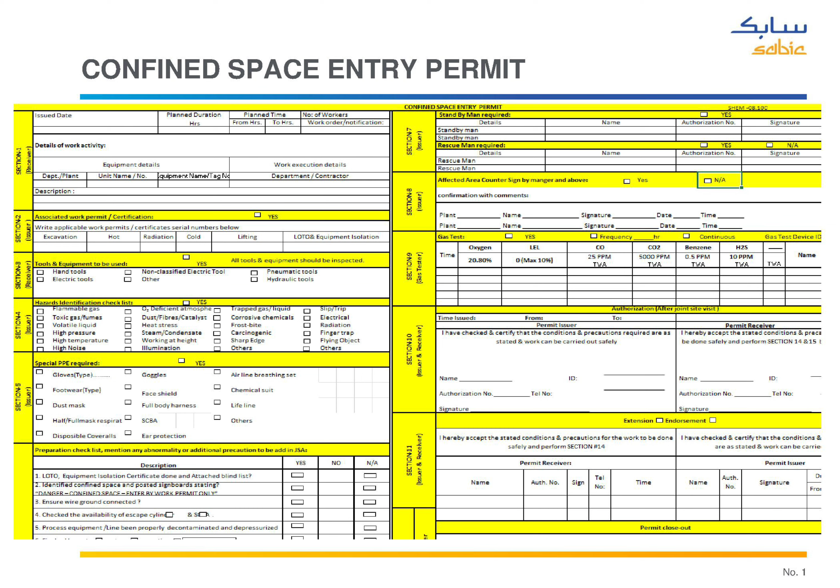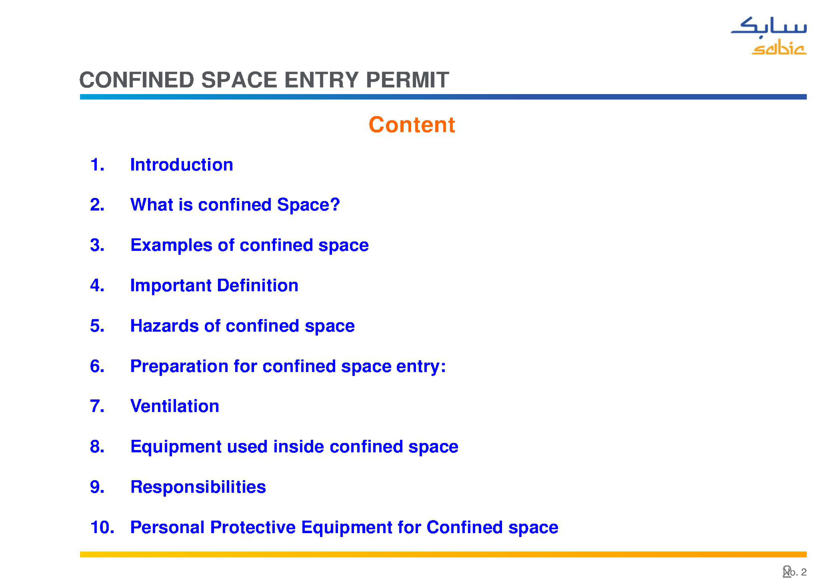Let's get started. You can see in the picture Confined Space Entry Work Permit, and Confined Space Entry Permit introduction. What is confined space, examples of confined space, important definitions, hazards of confined space, preparation for confined space entry, ventilation equipment used inside confined space, responsibilities, and personal protective equipment for confined space.

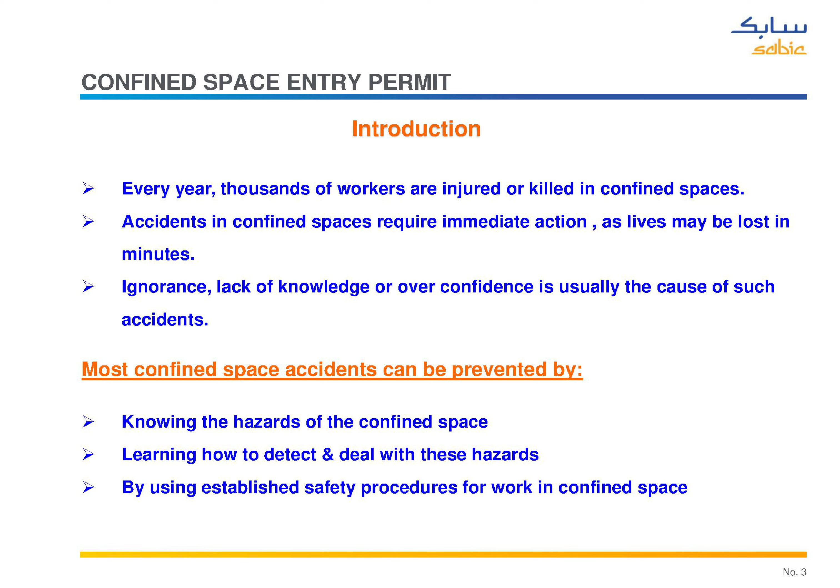Every year, thousands of workers are injured or killed in confined spaces. Accidents in confined spaces require immediate action, as lives may be lost in minutes. Ignorance, lack of knowledge or overconfidence is usually the cause of such accidents. Most confined space accidents can be prevented by knowing the hazards of the confined space, learning how to detect and deal with these hazards by using established safety procedures for work in confined space.

What is confined space? It is large enough and so configured that an employee can enter bodily and perform work. It has limited or restricted means of entry or exit. It is not designed for continuous human occupancy.

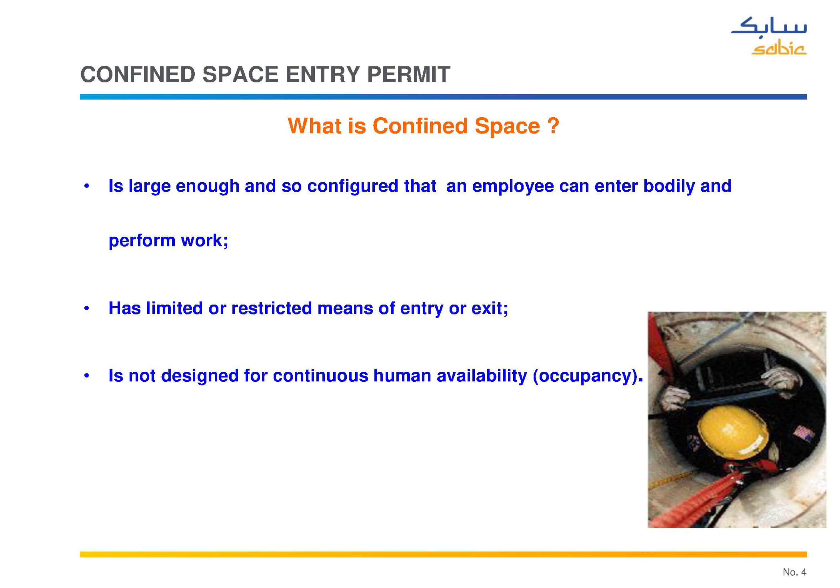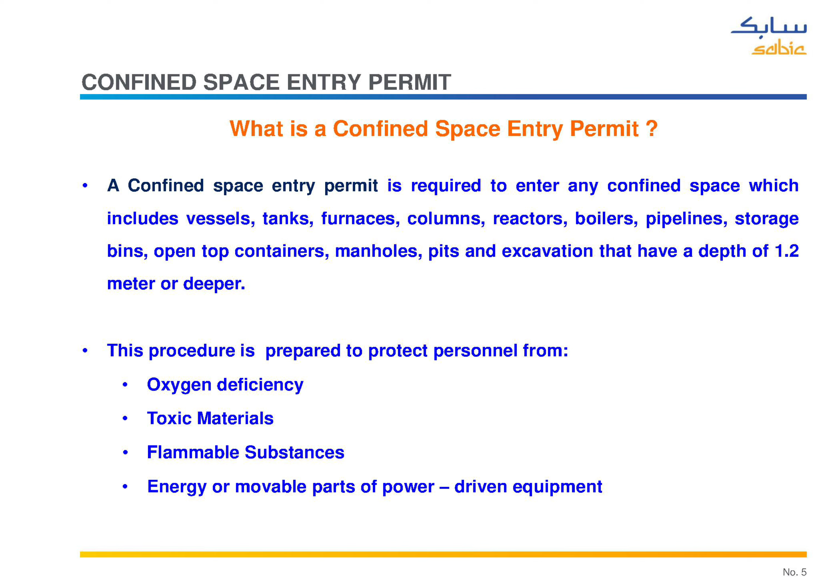What is a confined space entry permit? A confined space entry permit is required to enter any confined space, which includes vessels, tanks, furnaces, columns, reactors, boilers, pipelines, storage bins, open-top containers, manholes, pits and excavations that have a depth of 1.2 meters or deeper. This procedure is prepared to protect personnel from oxygen deficiency, toxic materials, flammable substances, energy or movable parts of power-driven equipment.

Examples of confined space, see in picture.

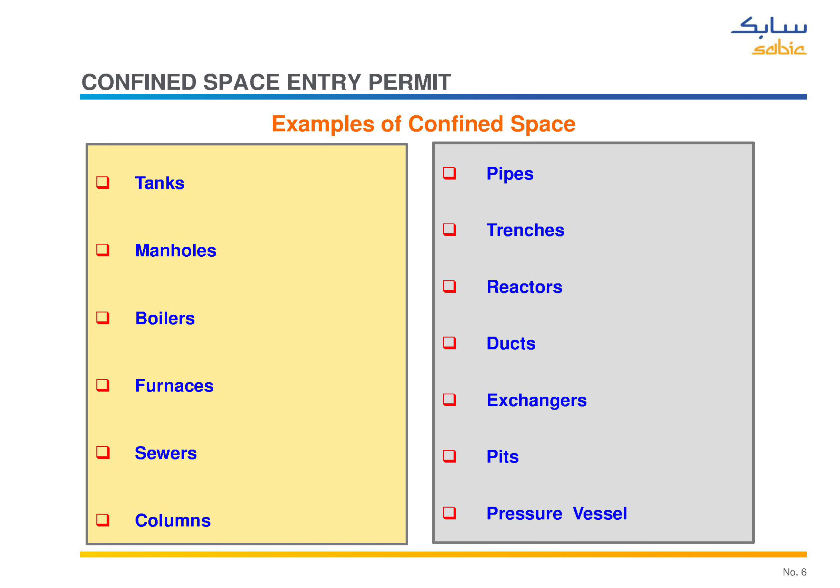Important definitions: Entrant - any person who enters the vessel. Entry - the insertion of the man's head or any part of the body into a confined space. Asphyxiant - a vapor or gas that can cause uneasy feelings, unconsciousness, or death by lack of oxygen, suffocation, such as nitrogen gas. SCBA - self-contained breathing apparatus.

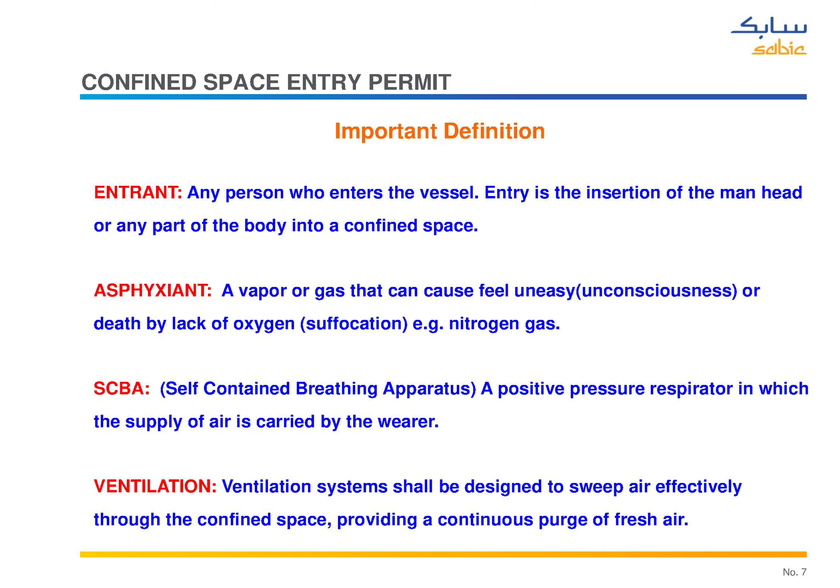A positive pressure respirator in which the supply of air is carried by the wearer. Ventilation systems shall be designed to sweep air effectively through the confined space, providing a continuous purge of fresh air. Airline respirator - a respirator connected to a compressed breathing air source by a hose. Rescue man - an individual trained, qualified, nominated and certified in rescue responsibilities, confined space hazards, and emergency procedures who has been assigned to remain outside the confined space.

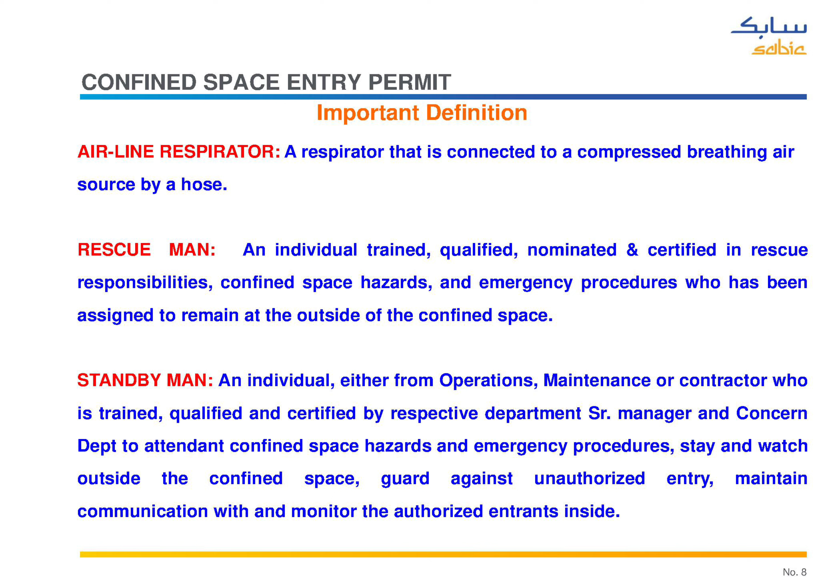Standby man - an individual, either from operations, maintenance or contractor, who is trained, qualified and certified by the respective department senior manager and concerned department to attend to confined space hazards and emergency procedures, stay and watch outside the confined space, guard against unauthorized entry, and maintain communication with and monitor the authorized entrant inside.

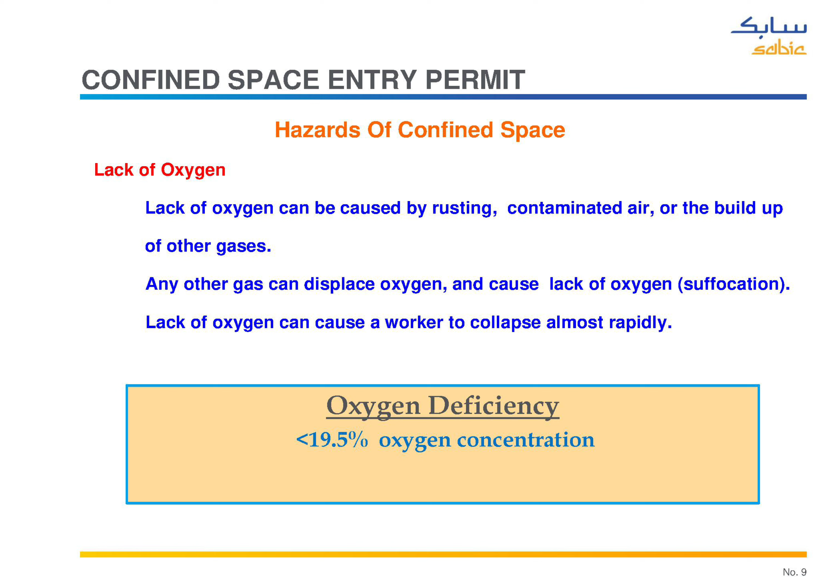Hazards of confined space: Lack of oxygen can be caused by rusting, contaminated air, or the buildup of other gases. Any other gas can displace oxygen and cause lack of oxygen, suffocation. Lack of oxygen can cause a worker to collapse rapidly. Oxygen deficiency is defined as less than 19.5% oxygen concentration.

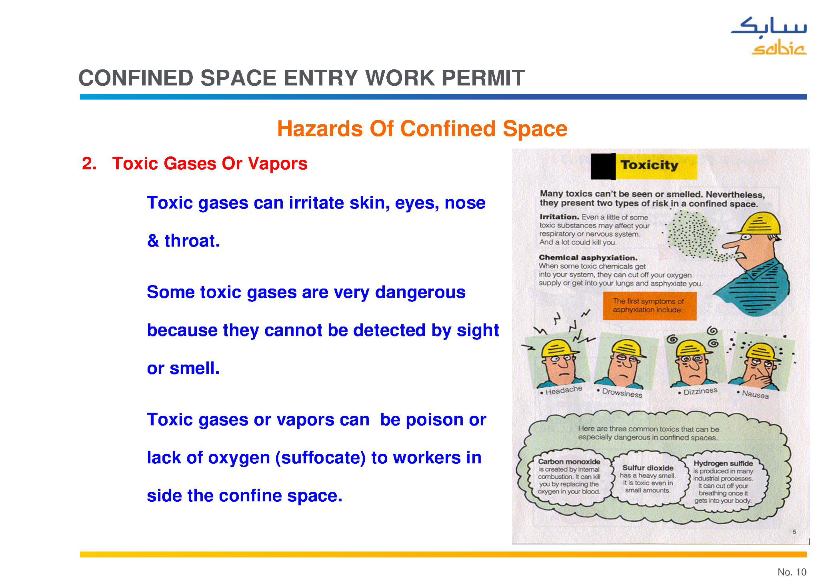Toxic gases or vapors can irritate skin, eyes, nose and throat. Some toxic gases are very dangerous because they cannot be detected by sight or smell. Toxic gases or vapors can poison or cause lack of oxygen, suffocating workers inside the confined space.

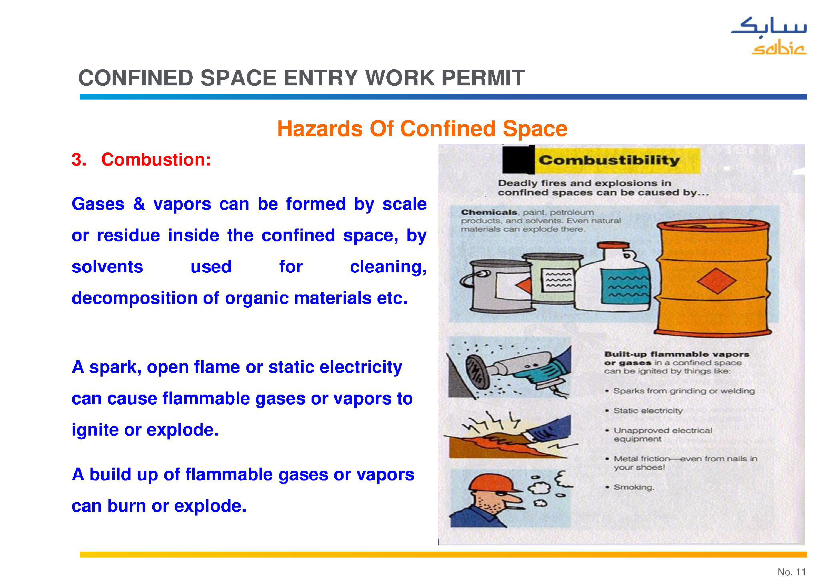Combustion: gases and vapors can be formed by scale or residue inside the confined space, by solvents used for cleaning, decomposition of organic materials, etc. A spark, open flame or static electricity can cause flammable gases or vapors to ignite or explode. A buildup of flammable gases or vapors can burn or explode.

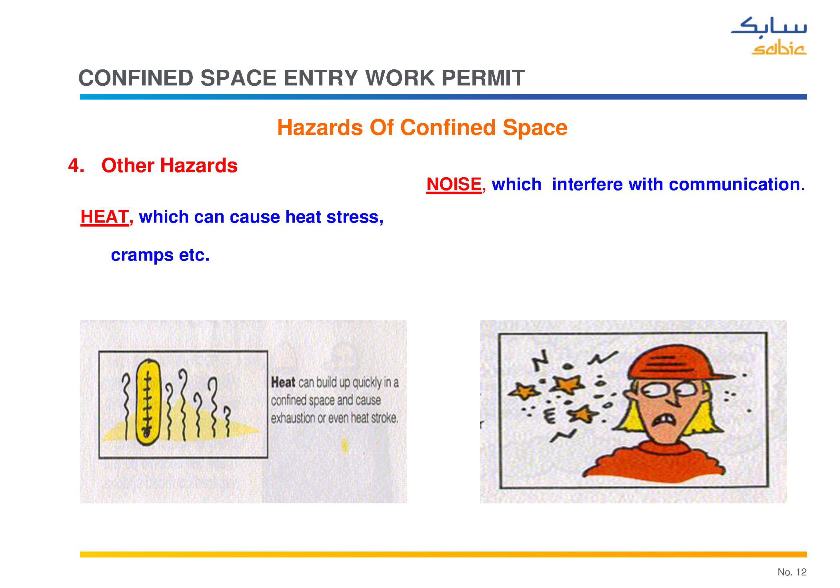Other hazards: Heat, which can cause heat stress or cramps. Noise, which can interfere with communication. Mechanical equipment, which can cause sparks and physical injury.

Preparation for confined space entry. The operations supervisor is responsible to lead and ensure the following tasks as preparation for entry by using the relevant SOP: draining, depressuring, flushing, washing, cleaning, steaming, isolation, blinding, ventilating, and gas testing, both initial and at frequent intervals.

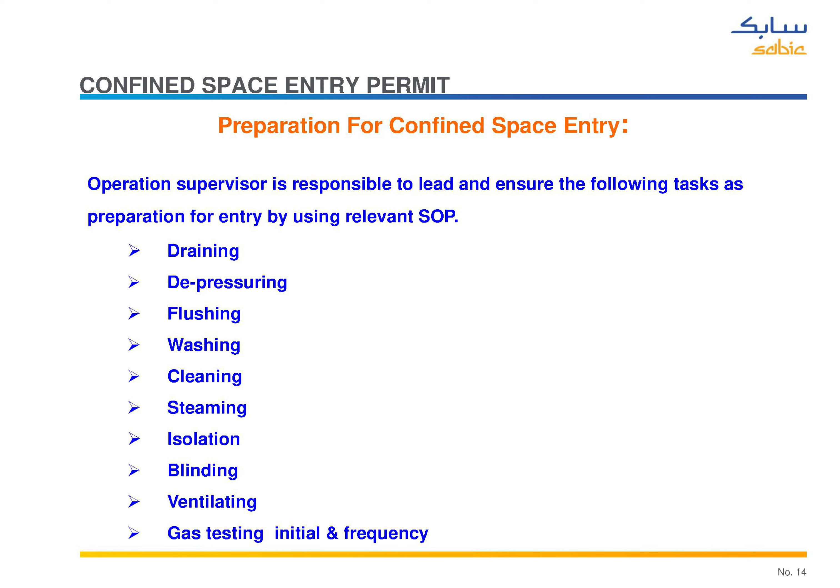Isolation involves either disconnecting lines and installing blind flanges on the open pipe flanges, as close as possible to the equipment, or installing blind flanges in the pipes themselves. Electrical lockout involves locking out any electrically operated equipment connected to or associated with the vessel or confined space.

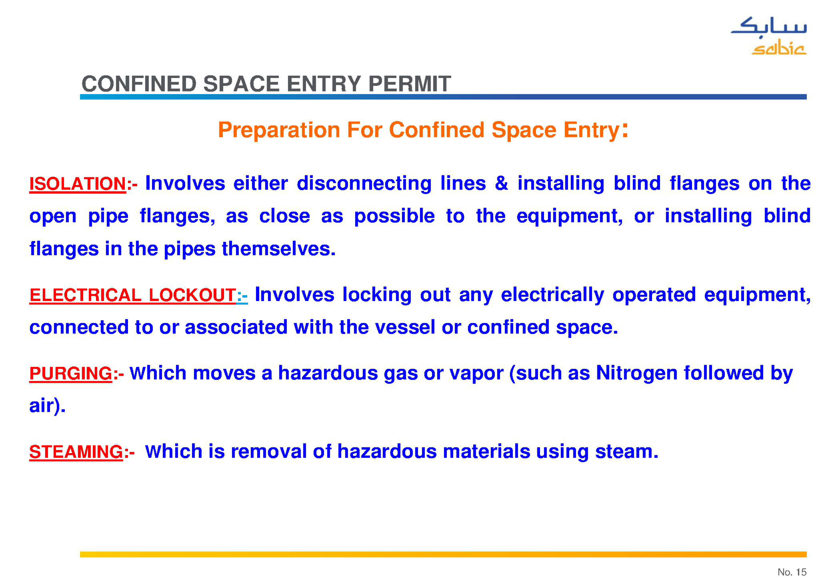Purging, which removes a hazardous gas or vapor, such as nitrogen, followed by air. Steaming, which is removal of hazardous materials using steam. Flushing, which moves hazardous materials to a safe location using non-hazardous materials such as water. Ventilation, which displaces a possible hazardous atmosphere with air.

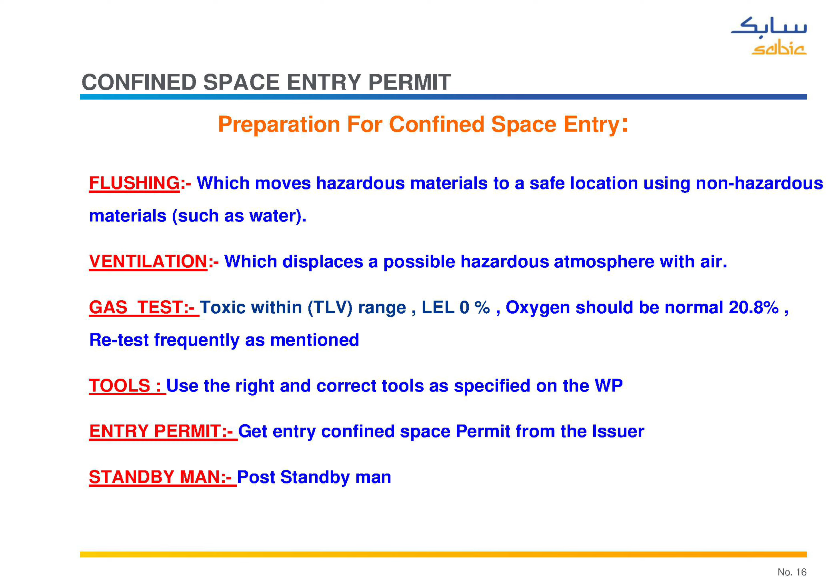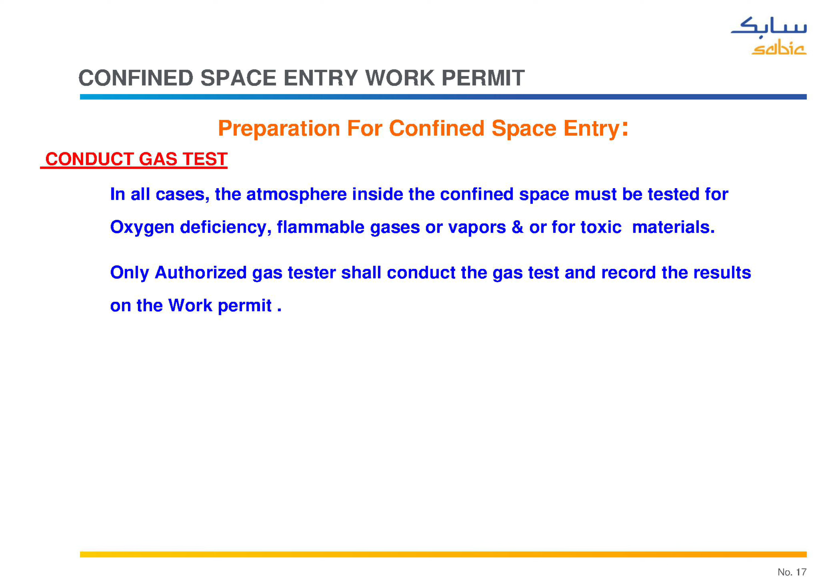Conduct gas test in all cases. The atmosphere inside the confined space must be tested for oxygen deficiency, flammable gases or vapors, and/or toxic materials. Only an authorized gas tester shall conduct the gas test and record the results on the work permit.

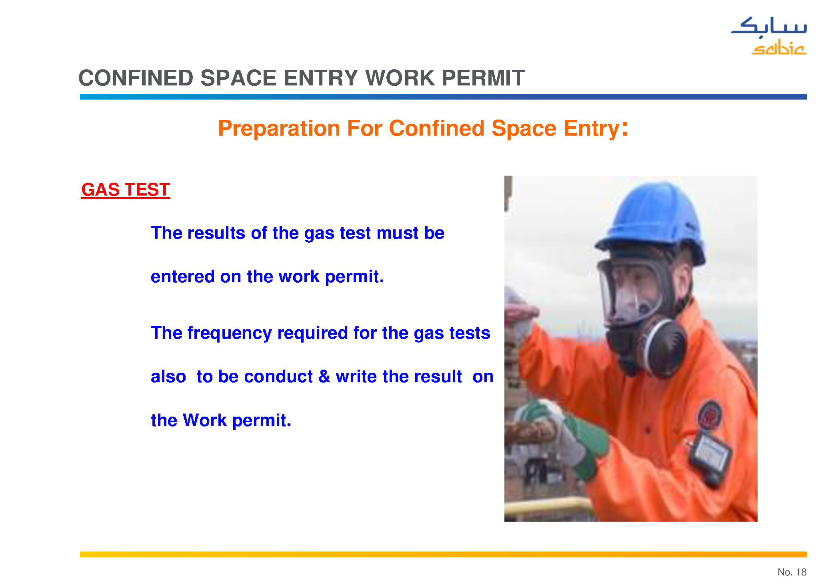Gas test. The results of the gas test must be entered on the work permit. The frequency required for the gas tests also to be conducted and the result written on the work permit.

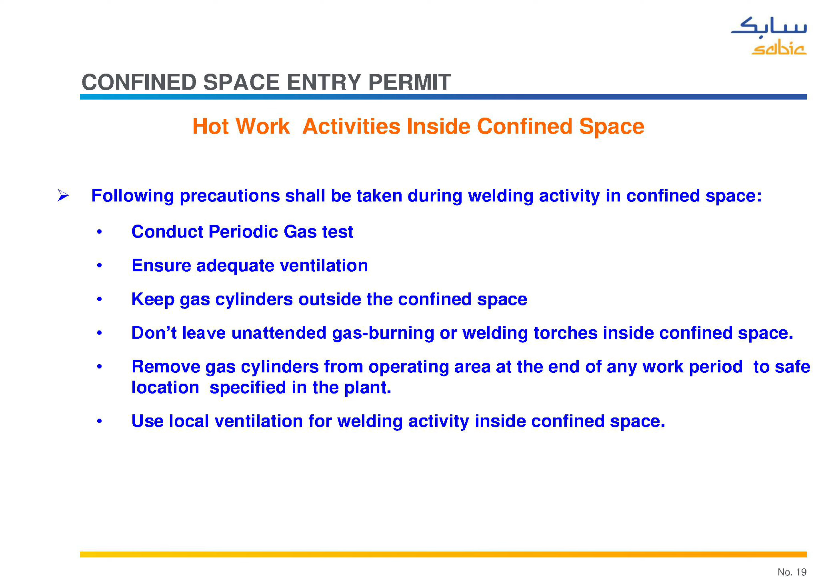Hot work activities inside confined space. Following precautions shall be taken during welding activity in confined space: conduct periodic gas test, ensure adequate ventilation, keep gas cylinders outside the confined space, don't leave unattended gas burning or welding torches inside confined space. Remove gas cylinders from operating area at the end of any work period to safe locations specified in the plant.

Use local ventilation for welding activity inside confined space. Don't permit welding or cutting activities in an oxygen-enriched atmosphere. If tests indicate that the oxygen content is greater than 23.5%, use ventilation techniques to reduce the oxygen content to 20.8%. Keep compressed gas cylinders and welding machines outside when welding or cutting is being performed in any confined space.

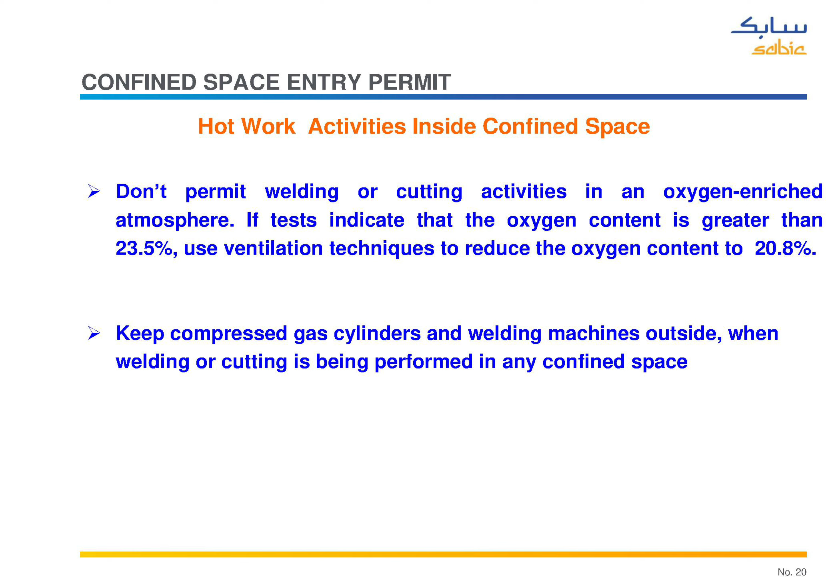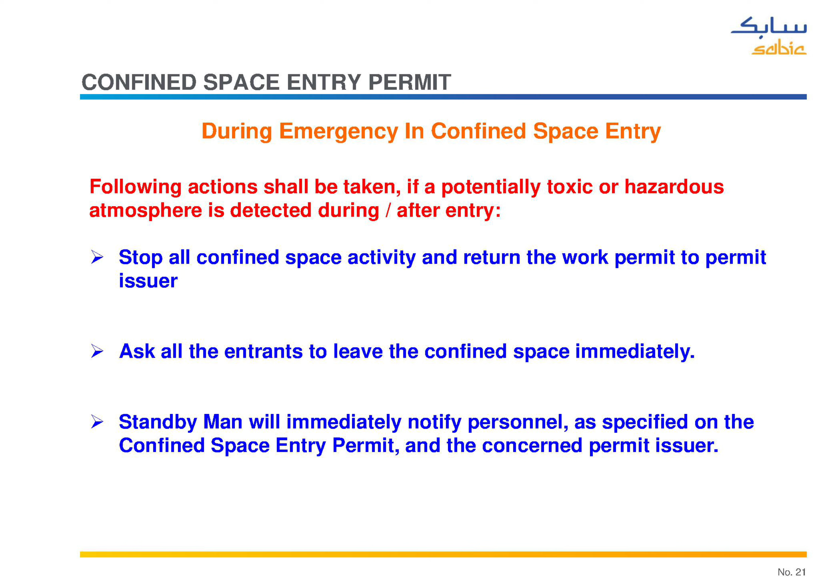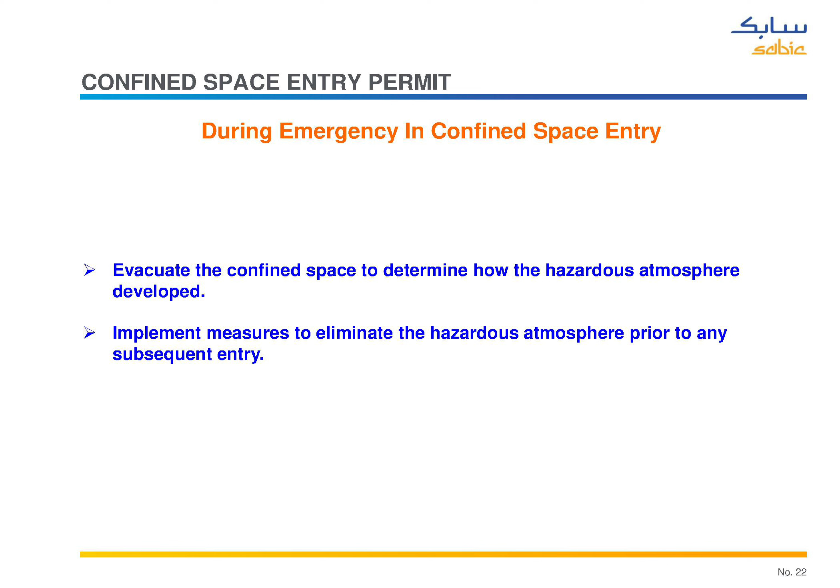During emergency in confined space entry, following actions shall be taken. If a potentially toxic atmosphere is detected during or after entry, stop all confined space activity and return the work permit to the permit issuer. Ask all the entrants to leave the confined space immediately. Standby man will immediately notify personnel, as specified on the confined space entry permit, and the concerned permit issuer. Evacuate the confined space to determine how the hazardous atmosphere developed.

Implement measures to eliminate the hazardous atmosphere prior to any subsequent entry. Ventilation in confined space: stop ventilation, purging at least 15 minutes prior to conducting the gas tests, to allow gas concentration to equalize. The gas test must be repeated if the entry was not done for 30 minutes once the gas test is conducted. Also, gas testing shall be repeated after every work break.

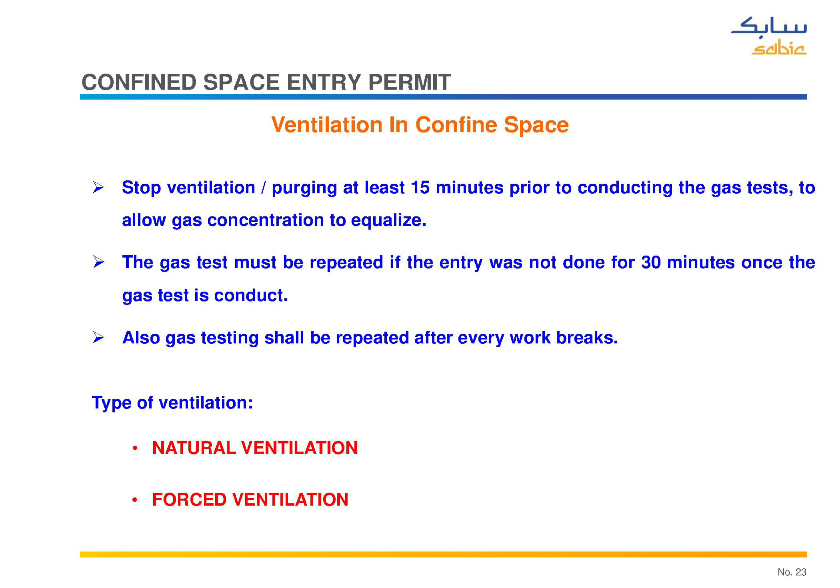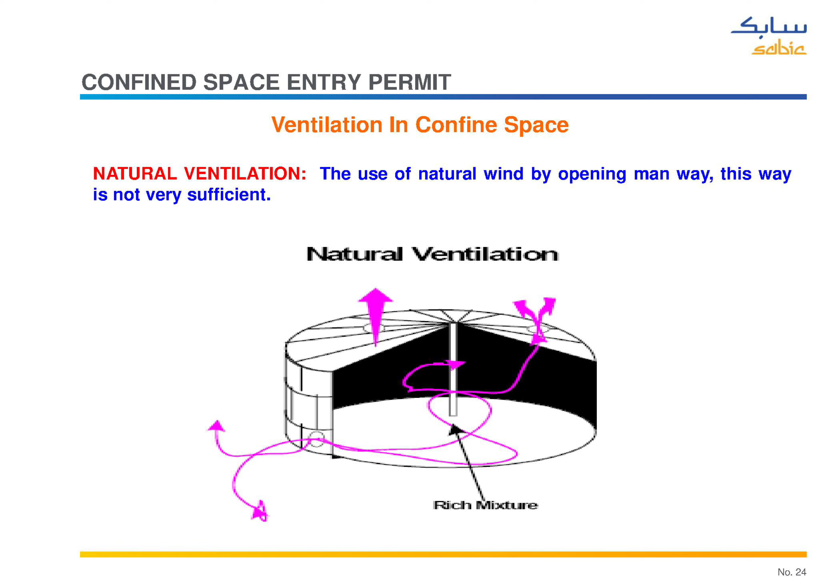Type of ventilation: natural ventilation, forced ventilation. Natural ventilation is the use of natural wind by opening the man-way; this way is not very sufficient. Forced ventilation is the use of a fan or air mover to move fresh air through a vessel.

Comply with the following points for continuous forced air ventilation in confined space. Ensure air supply for the forced air ventilation comes from a clean source and should not increase the hazards in the confined space. Use non-sparking, safe, and electrically fused and grounded equipment to avoid accumulation and discharge of static electricity. Do not use oxygen to ventilate confined spaces.

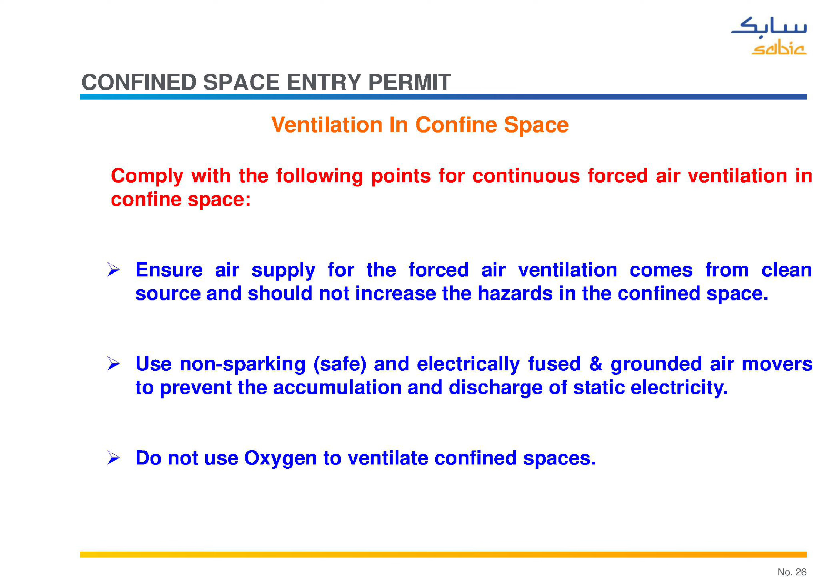Conditions that could adversely affect air quality include residue hydrocarbon gassing off due to the heat of the day, hydrocarbons trapped inside chunks behind vessel lining, leaking oxygen or acetylene hoses used for hot work, and reaction products or fumes from chemicals used for cleaning.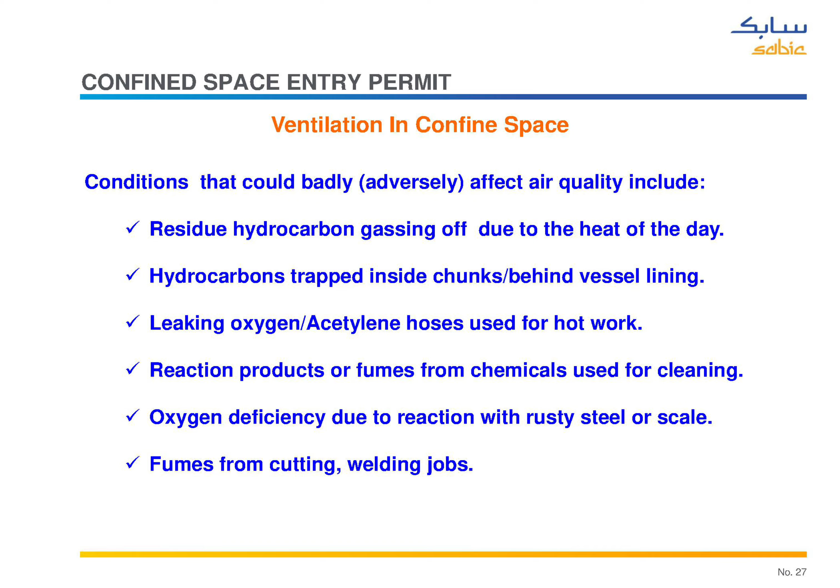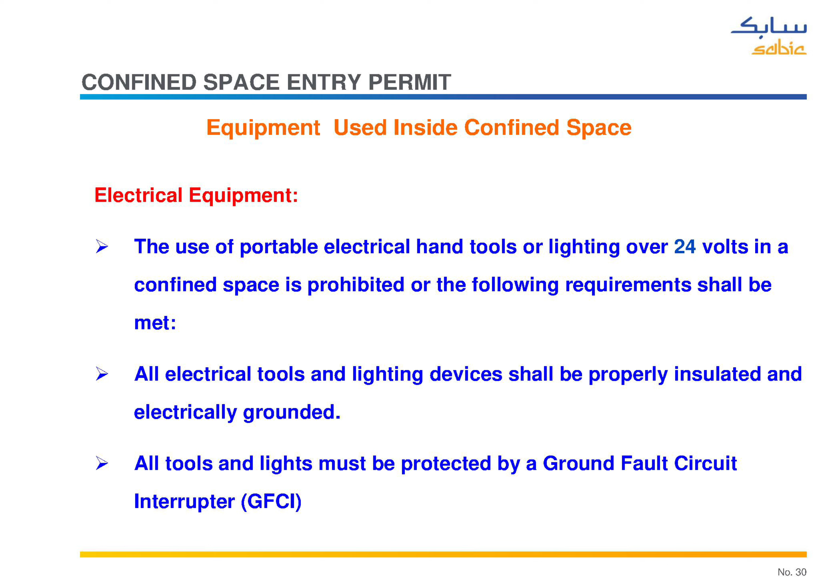Equipment used inside confined space. Electrical equipment: the use of portable electrical hand tools or lighting over 24 volts in a confined space is prohibited, or the following requirements shall be met. All electrical tools and lighting devices shall be properly insulated and electrically grounded. All tools and lights must be protected by a ground fault circuit interrupter, GFCI.

Tools and other equipment: pneumatic tools used in confined spaces can only be driven by air. If gas welding or cutting, e.g. oxygen acetylene, is required inside a confined space, only the hoses and torch may be lowered through the manhole. Proper internal and external scaffolding should be erected as required, so as not to hamper entrance or exit of confined space. When persons are working in close proximity or overhead of each other, suitable barriers shall be provided.

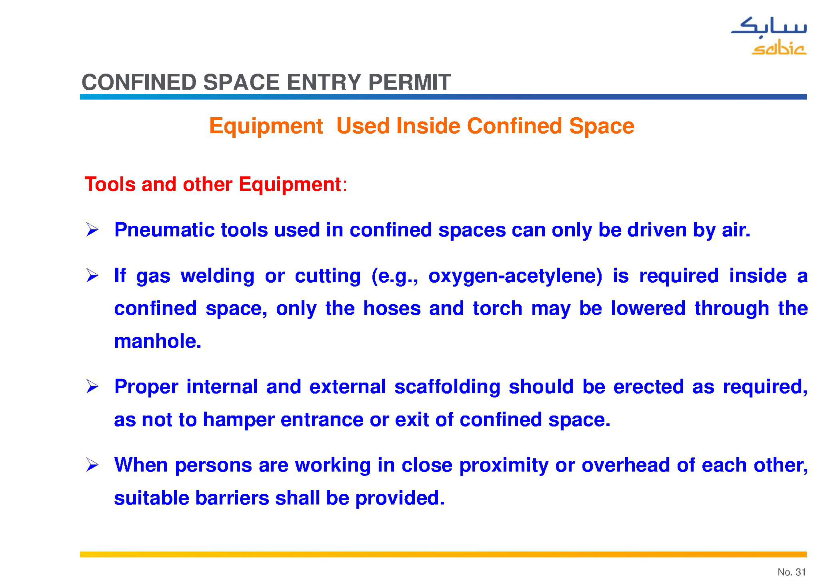Responsibilities. You will read it.

Permit receiver: check and ensure the following are in place. Prepare the JSA and participate in joint site inspection with operations supervisor and ensure it is documented in the work permit. Fill confined space entry permit.

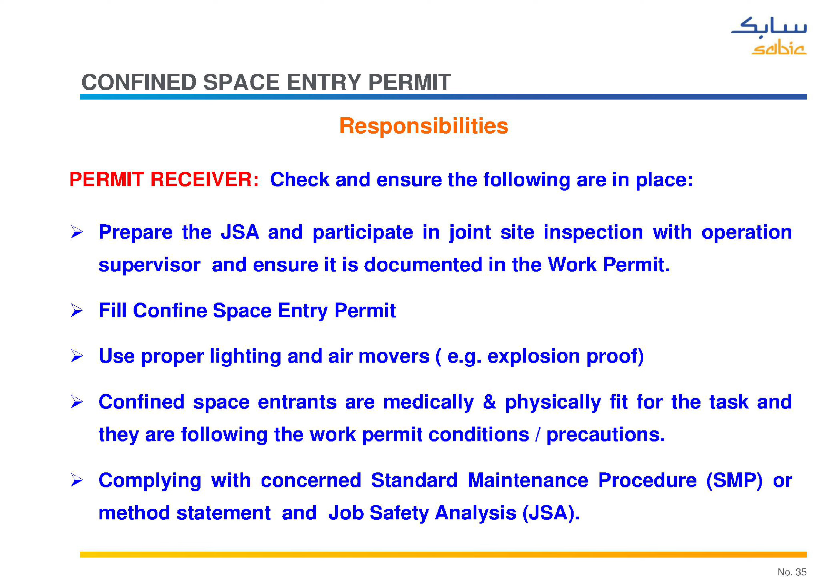Use proper lighting and air movers, e.g. explosion proof. Confined space entrants are medically and physically fit for the task and they are following the work permit conditions and precautions, complying with concerned standard maintenance procedure, SMP, or method statement and job safety analysis.

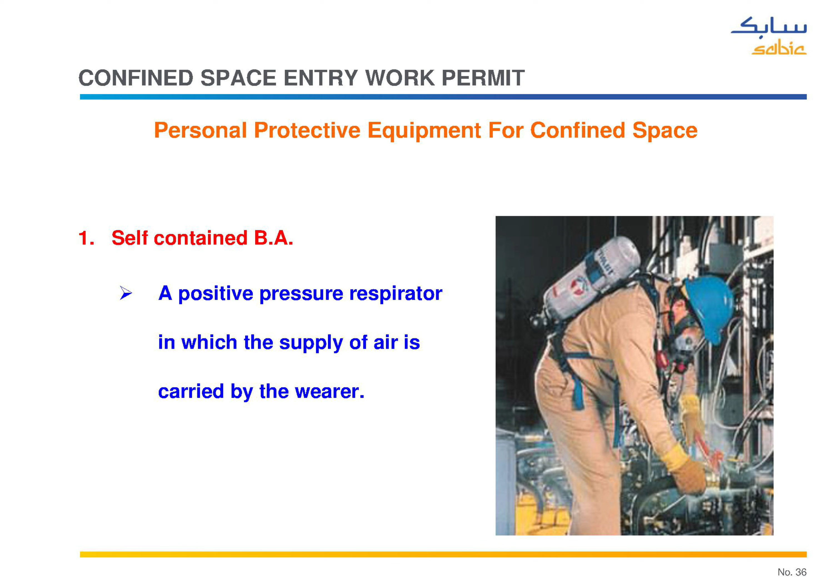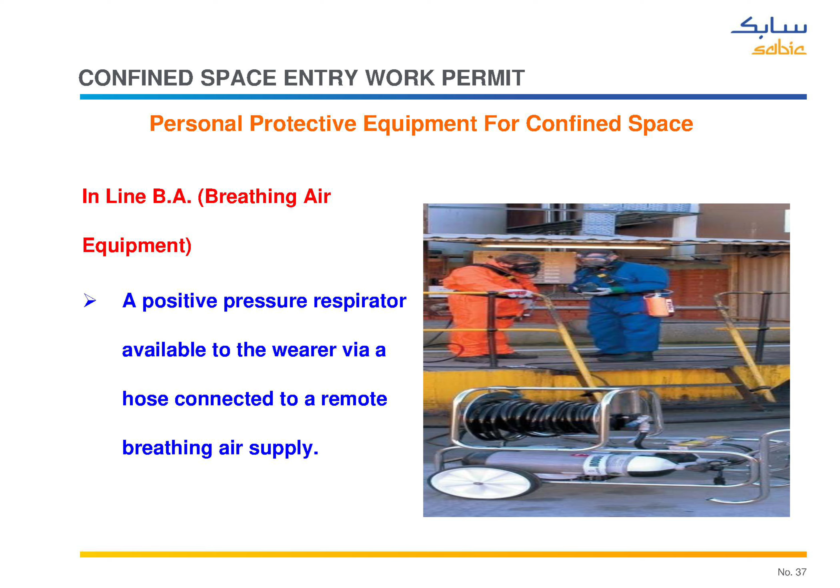Personal protective equipment for confined space. Self-contained BA, a positive pressure respirator in which the supply of air is carried by the wearer. Inline BA, breathing air equipment, a positive pressure respirator available to the wearer via a hose connected to a remote breathing air supply. Safety lines.

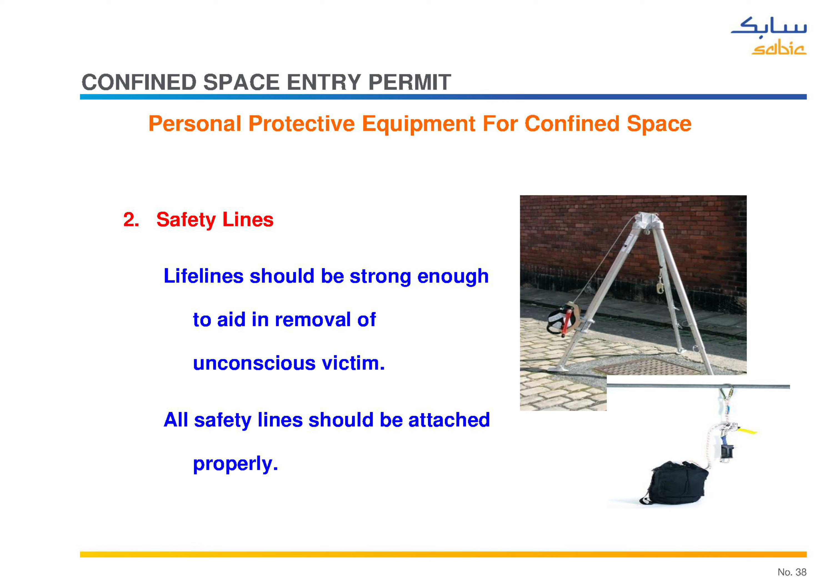Lifelines should be strong enough to aid in removal of an unconscious victim. All safety lines should be attached properly. Safety harness: safety harnesses should have quick release devices to allow fast removal in an emergency.

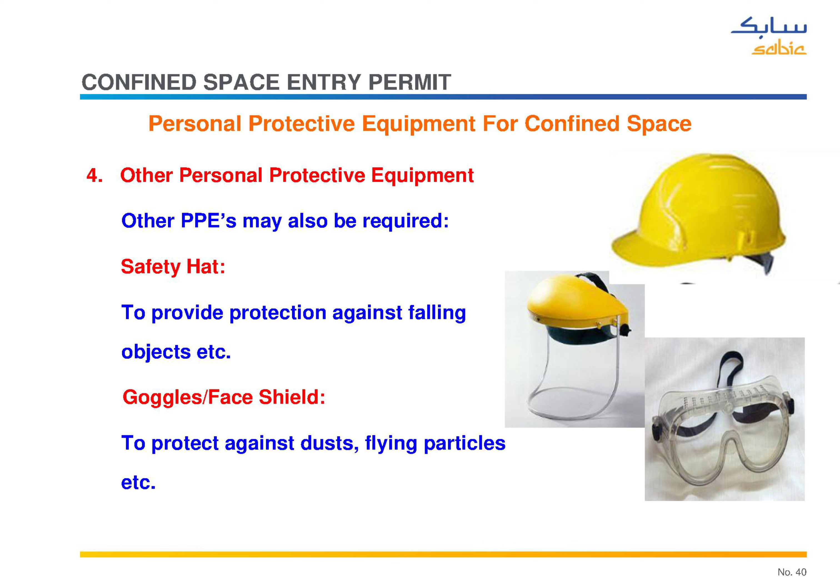Other personal protective equipment may also be required: safety hat to provide protection against falling objects, goggles and face shield to protect against dusts and flying particles.

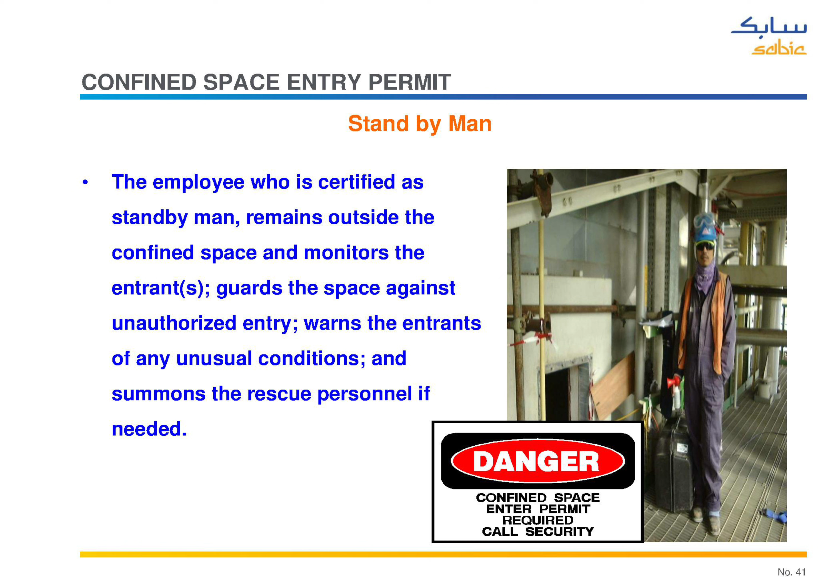Standby man: the employee who is certified as standby man remains outside the confined space and monitors the entrants, guards the space against unauthorized entry, warns the entrants of any unusual conditions, and summons the rescue personnel if needed. You can see.